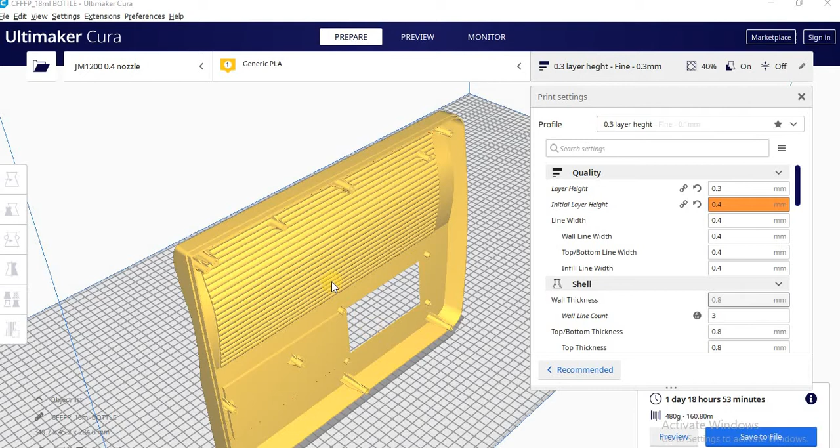So today I will teach you how to resume the print even after the power cut or even after the filament breaks unexpectedly. So this is a very big print. So the printing area you can see on the screen is 1000 by 550 by 650. So all this size is mentioned in the JM 1200 0.4 nozzle.

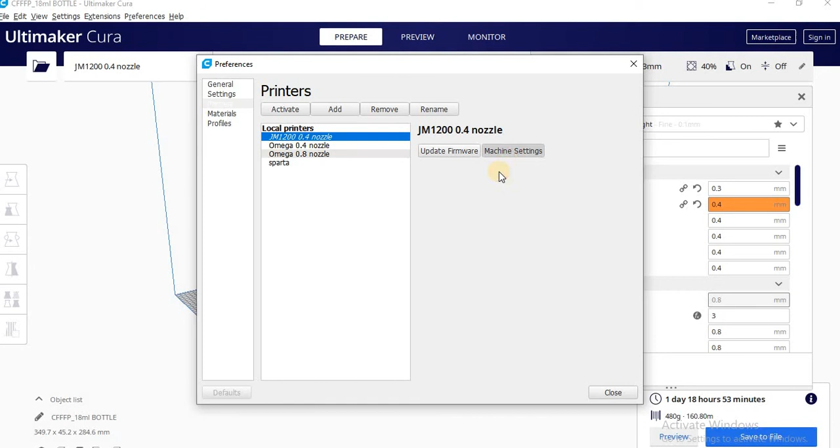I will show you this machine start G code and end G code. So this is the working area. The X is 1000, Y is 550. So we are more interested in the Y axis. I will show you why we are more interested in the Y axis working area.

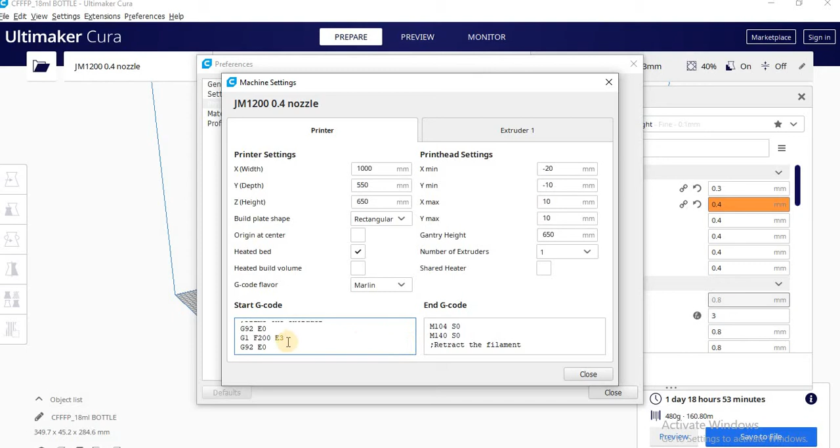So this is the maximum working area and this is the start G code. I will show you this G code is mentioned in the very beginning of the G code which is generated by Cura, and this is the end G code, but we do not need to worry about the end G code. We are more interested in the start G code while resuming the printing. All this will automatically appear in the beginning of the G code. So let us close this.

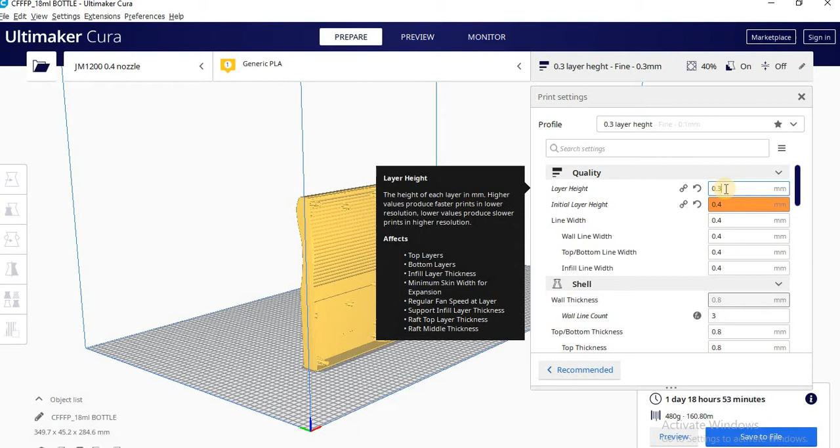So this is an ionizer cover, and when we slice using these parameters, the layer height is 0.3 mm. The initial layer height is 0.4 mm of course, but all other layer heights are 0.3 mm. So after slicing, we will see that it is a 1 day 18 hours print. It's a very big print and 480 grams.

So when we see the preview, we can see it is 945 layers. These layers will increase if you decrease the layer height. For example, if it is 0.15, half the layer height, then double the layers. So like that.

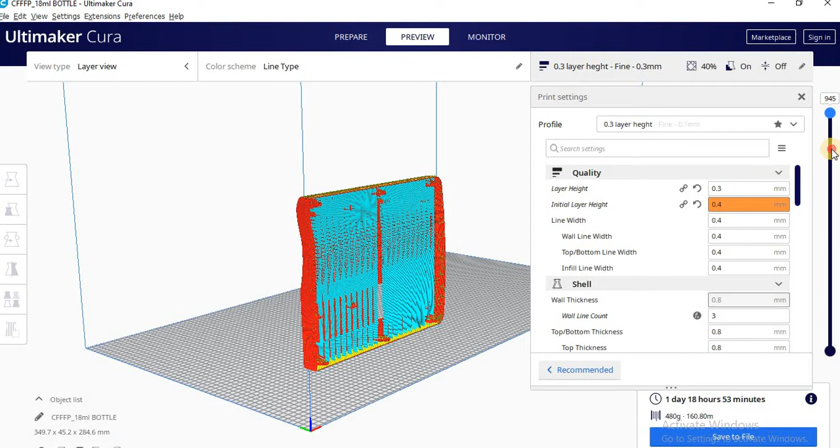So for example, somewhere near layer 481, about half the print, your power failure or filament breakage happens. So it is necessary to know how we can resume, because more than 15 or 20 hours of print is already done, and suddenly the power fails or the filament gets stuck with the spool. So in this case, let us learn how to resume.

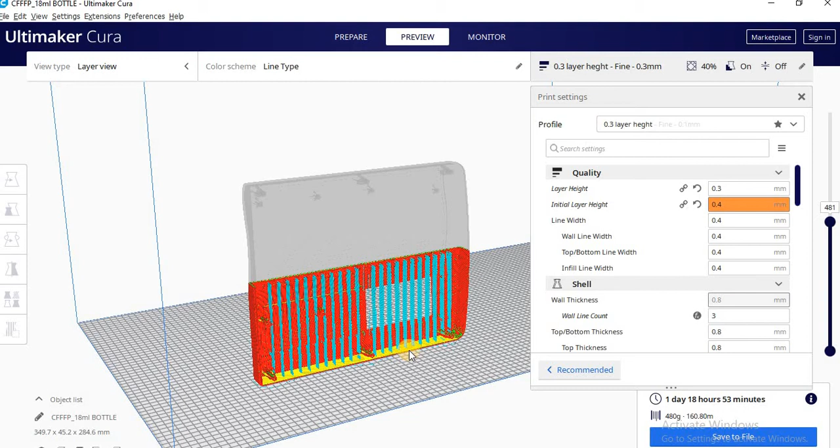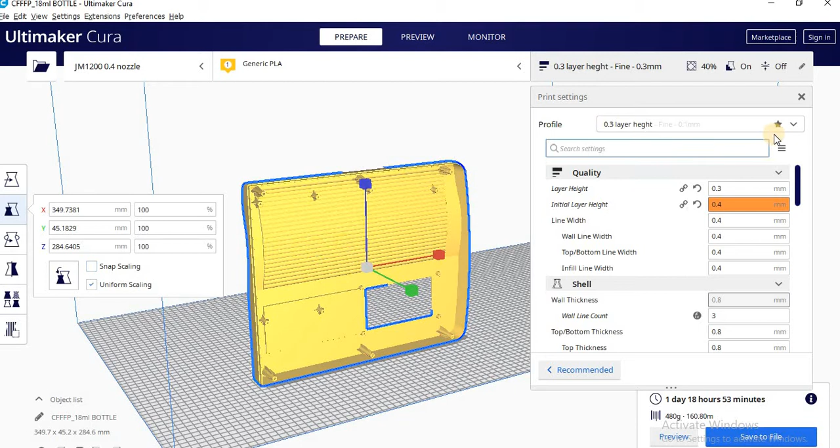So let us check the overall object dimensions in the scale. Z is 284 mm. So let us assume that the object which was printing stopped at about 125 mm. We don't know what the layer is at 125 mm.

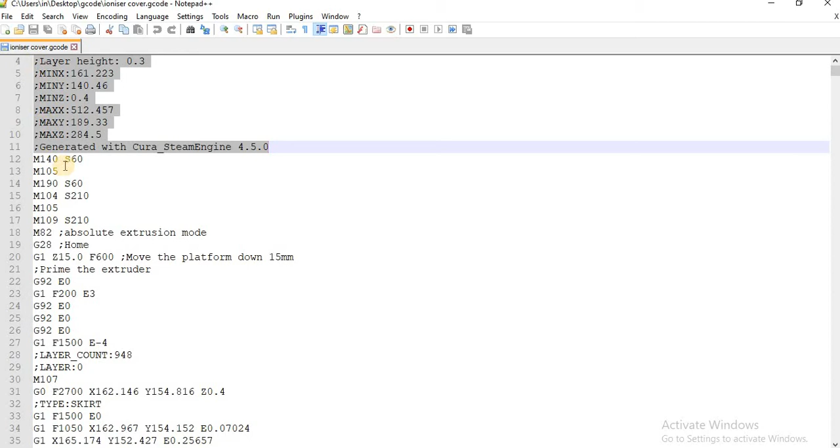So let us save this G code in any directory. I have already saved this G code in the G code folder. Right click and edit with Notepad++. It is very convenient software just like Notepad. So this is the G code. Ignore these initial lines, they are comments, and whatever S is shown is a temperature, so 60 degrees for the heat bed and 210 degrees for the nozzle. All these S values are temperature commands.

This M82 is absolute extrusion mode, and from this line 19, G28, up to here is the start G code which I have shown you in the machine settings. So this is exactly the same group of lines which will appear in the beginning. This is the starting G code, this is the layer count, and this is the beginning of layer 0, and after a few lines you will see layer 1, then layer 2, and like that up to layer 948.

So first, press Ctrl F and write here Z125, where we assume our machine was halted or maybe had some accident. We have to measure using vernier calipers, very accurate instruments. So what we observe is 125 mm is the height of the already printed part. So write down Z125 and find next.

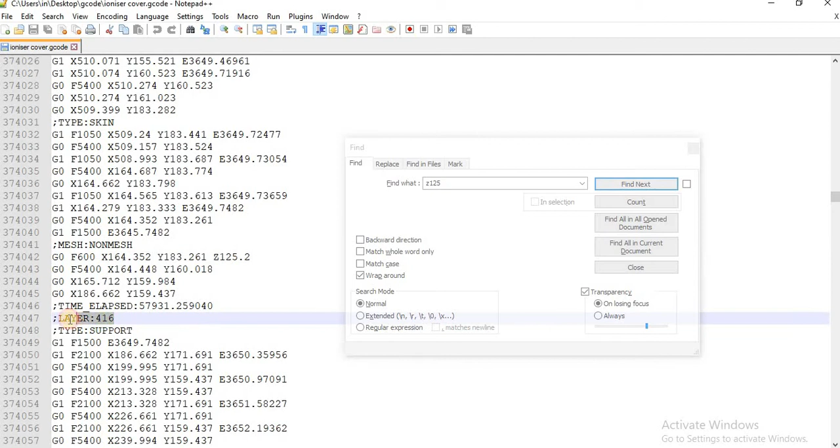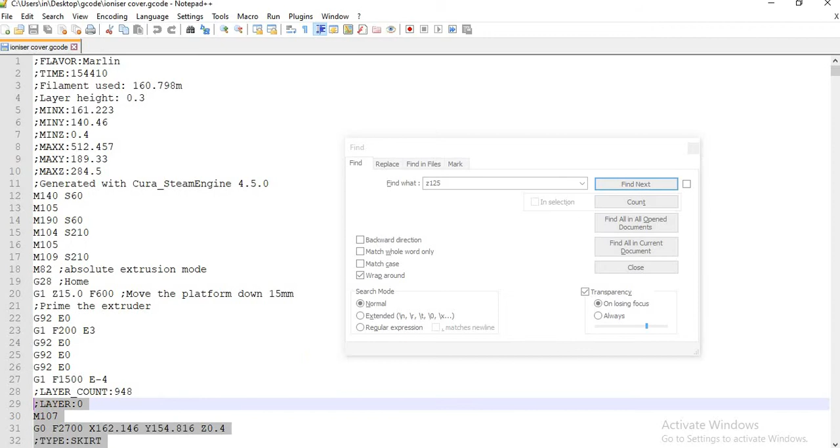So it is the layer number 416. So Z 125.2 is a part of 415. So select all the layers above the 416 layer line up to layer 0 and delete them. So this selection is layer 0 to layer 415. So we will delete it. Delete. So now we can see the first layer is 416. So all the previous layers we have deleted.

So we have to add a couple of lines, because here we can see G28 means X, Y, Z. All these three axes will go to home. So we do not want to home the Z axis now. So first write X0, Y0. So this will home only the X and Y axis.

And now add one line, that is G0. You can copy this line, because after layer 416, the first line will be this. Write down the speed. Generally the speed of printing is 1500. So as I said, we are more interested in the Y axis. X is okay because it is the first position of the 416 layer. But for the Y axis we have to write about the maximum printing area.

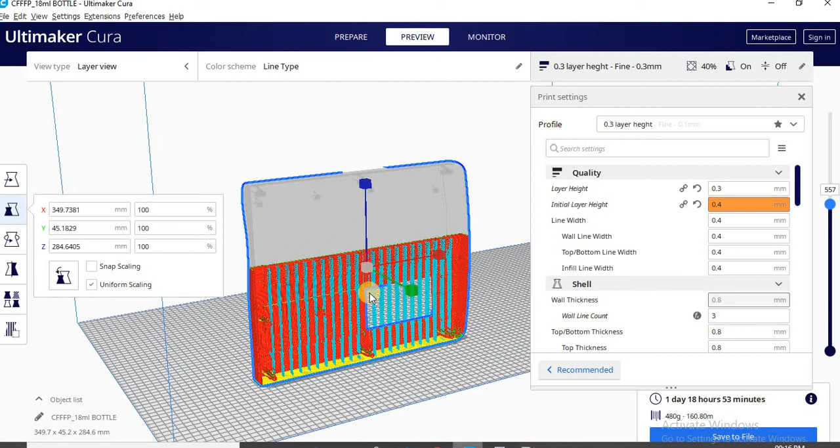So the maximum printing area of this machine I will show you again. So the maximum printing area of this machine was 550, but our object is near the front. This is the front. So here there's a lot of space. So we first have to move our machine to the back side where the empty space is. So if this is 550, this area must be about 400. So the machine will go here, to the back side of the object.

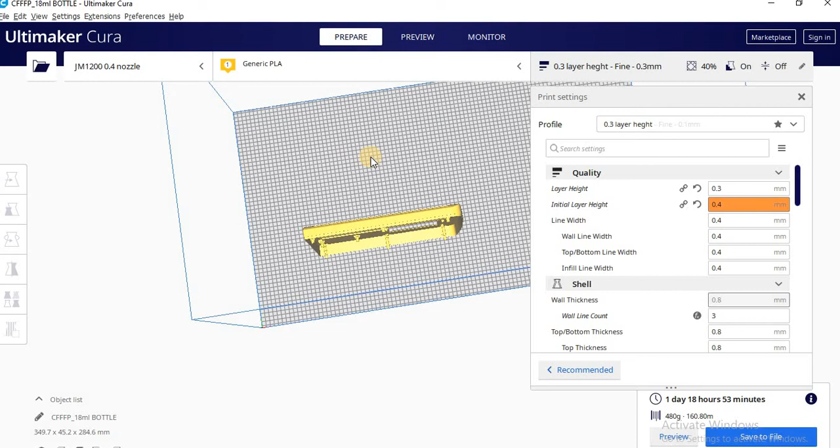So write down here 400. So X is as it is, and Y is the backside of the object. So after X and Y home, the machine will go to this position. After it reaches this position, we want to do Z home. So just copy this line, paste here, and write Z0. So this will do the Z home at the back side, behind the object.

After the Z home, we want to move to the Z125.2 position. So here we will copy this line. Oh, sorry, this should not be here because the speed is already mentioned here. So remove it or decrease the speed. Copy this, paste here, and mention the Z position here, the first height of this layer 416.

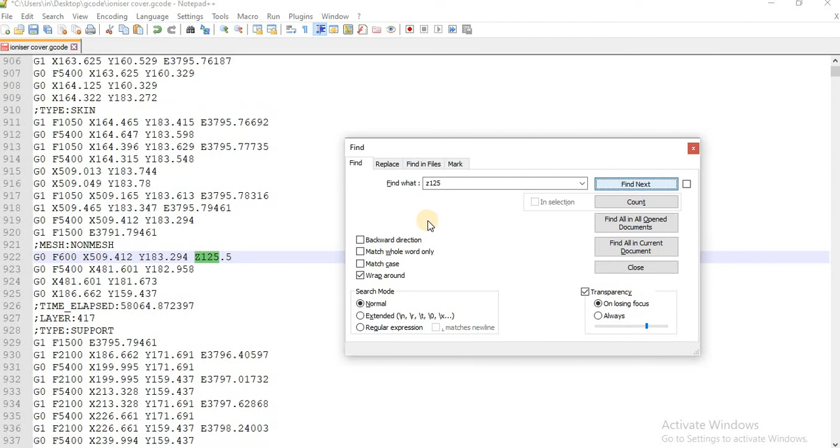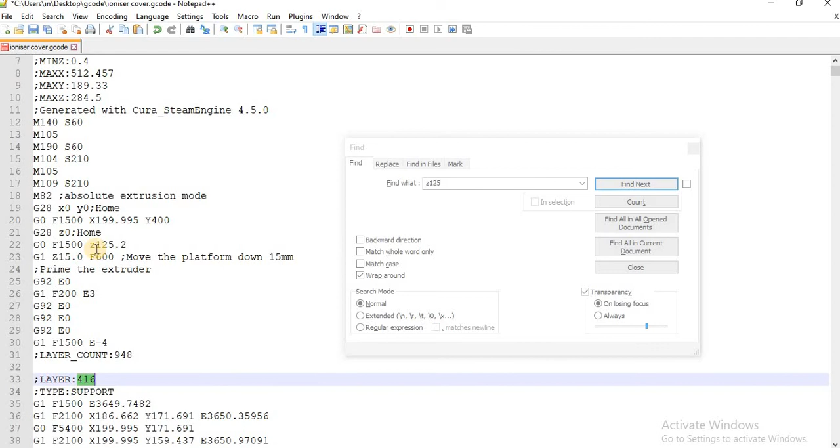So do find next. Oh, find next is Z125.5, but the previous one was Z 125.2. So this whole layer 416 will be printed at 125.2, since we have deleted the previous layers.

So you can see the procedure is G28 X0 Y0, so only the X and Y axis will home. So your limit switch must be rigid, it should not be movable, it should not be loose. Then after homing X and Y, the machine will go to this position X199.995, which we have copied from this position. It doesn't matter if it is a little different. The machine will go to this position, Y 400, the backside of the printed object.

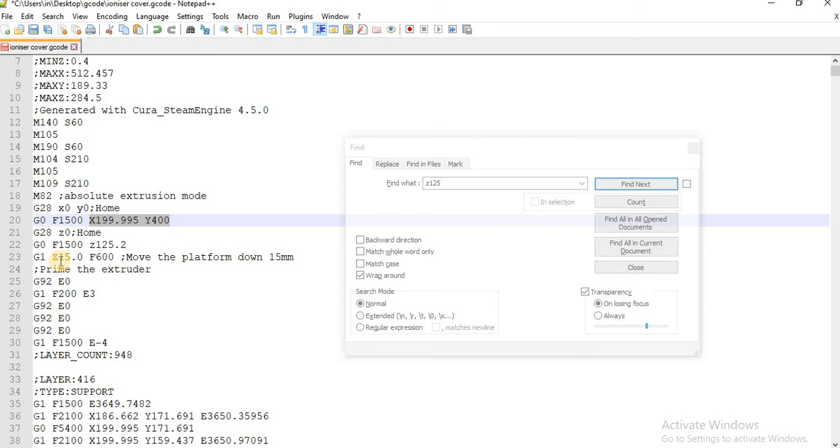Then it will do Z home, so that means the bed will touch the nozzle at the backside of the object, so our object is safe. And then the bed will move down to Z125.2, which is layer 416, and the rest is the same. And after this line, the machine will move to this position because it is already at Z125.2 and layer 416 begins.

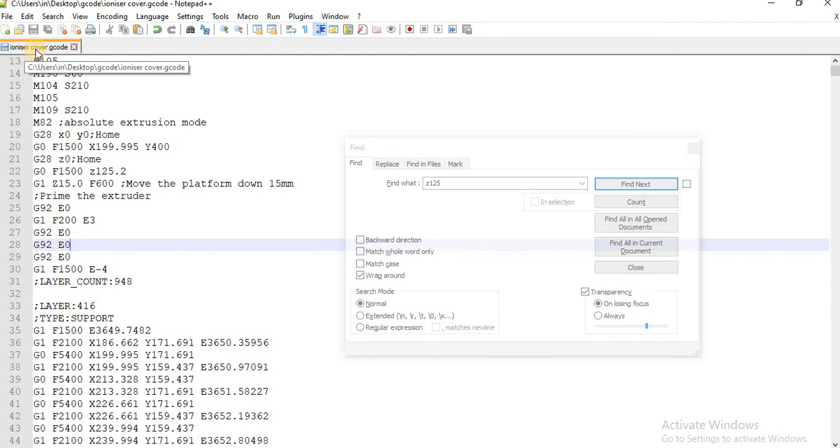So this way we have to save this file, insert the memory card or pen drive in the machine and select it. We should change the name for remembering purposes, that this is actually the start at Z125.2 mm. So that's it. This is the final G code. We can resume the print at the level of Z125.2. Only a couple of lines need to be added.